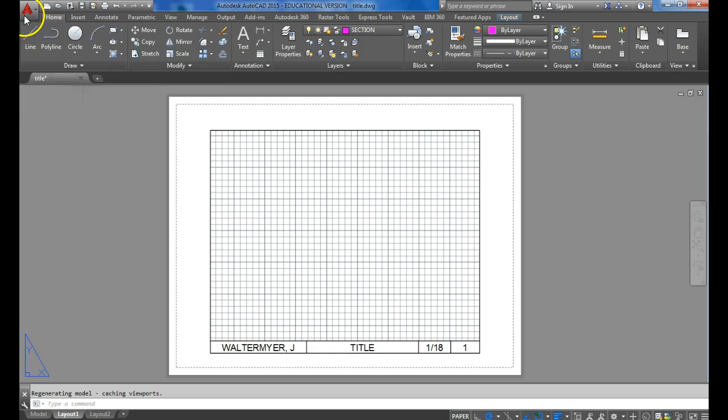Alright guys, so this is probably going to be our last assembly drawing. I already went ahead and opened up my title. I'm going to save as. This whole assembly is a machine screw jack. So I'm going to save it as MSJ1 for this first part. I'll update that stuff then.

Alright, this one is a lot of round things, kind of like pretty much all the other assemblies we did. I'm going to start this first part. This is the base to the whole jack. I'm going to do a center line 1.625 long. That's my entire length. I go object.

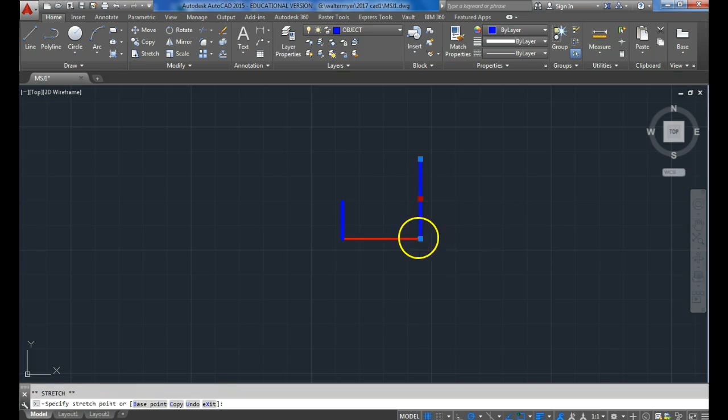Alright, this side diameter is 1.5 inches, so I'm going to go 0.75 up. The distance doesn't flat out tell me, so I'm going to come from this side. Diameter is 1.625. 1.65. I'm going to grab that so that it's centered up. Alright, this comes over 0.313.

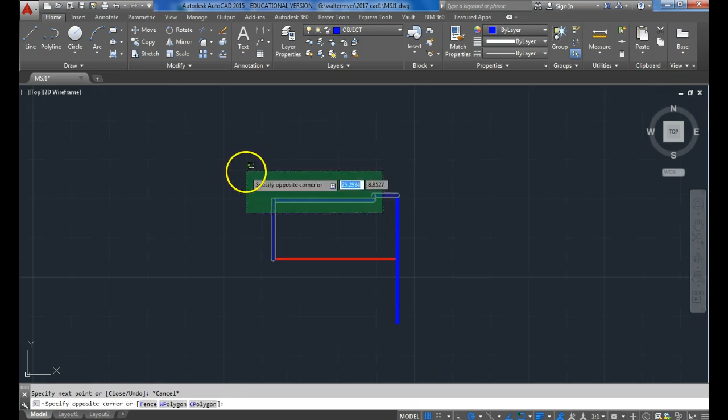That goes down to the smaller diameter. Bring this over and connect. And the bottom exactly the same. We add, stretch this line all the way across.

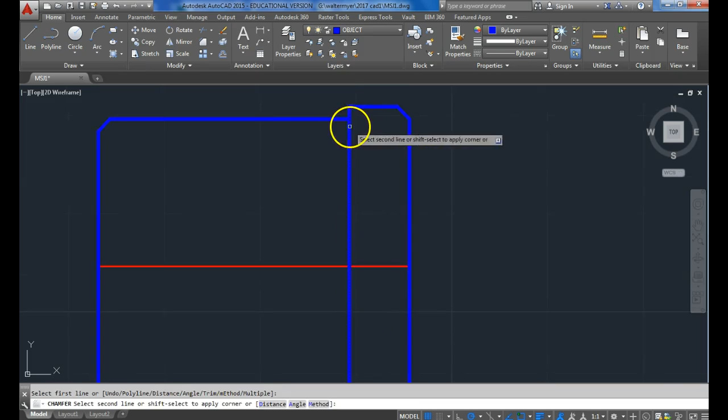Alright, let me do the chamfers first. So under fillet, chamfer, I'm going to do distance. Alright, distance is 1/16 by 1/16. Chamfer there, this end, and there. That makes new edges, so I will connect.

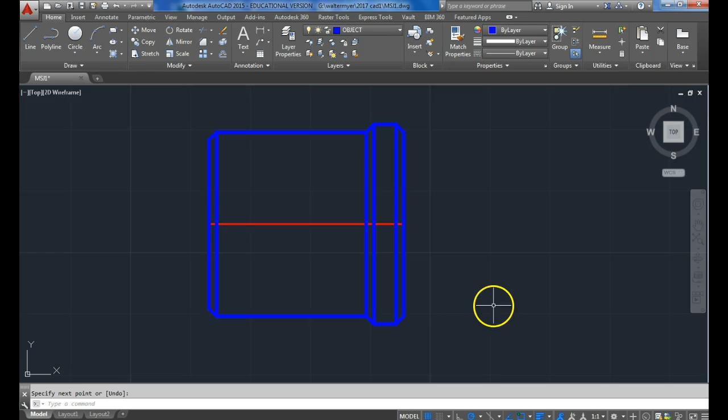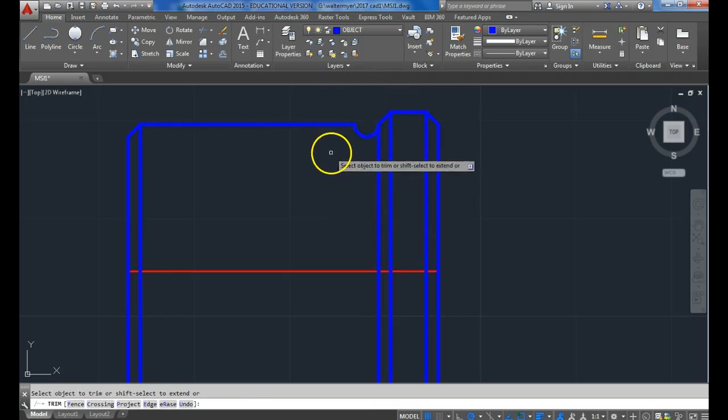There are internal threads, so we're going to do a partial section view here. So let me get the basic shape down. Do a 2-point circle. I'm going to go here. I'm going to come over the diameter, which is 1/8. Trim. This here. Have it down here. Trim. That trimmed. Has new edge.

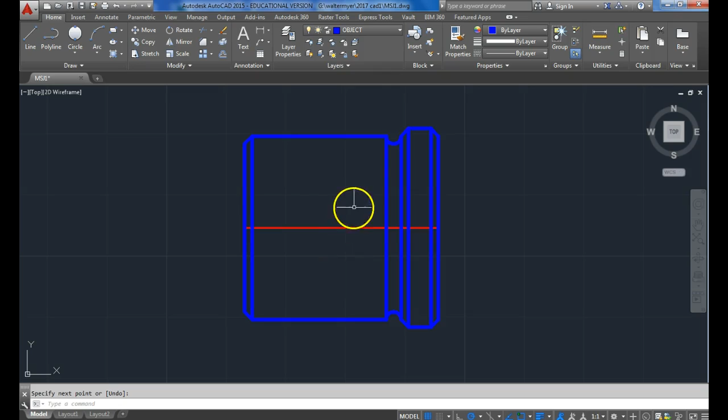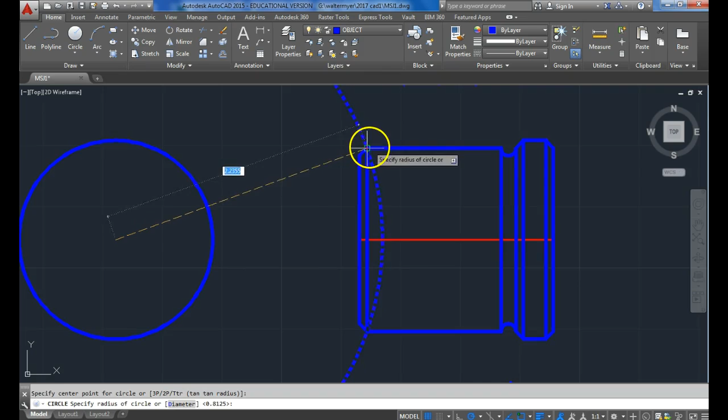There we go. Now, before I worry about doing the diamond knurl or the section view, I'm going to do the side here where I have the circles. If I do center radius, I can just bring them over. Center point. This one over. Center point. Alright.

Now, there is the inside hole for the threads. Alright, diameter threads are 1 inch. So 1. That is going to be hidden. I'm going to use offset 1/16 and offset it. And inside 1, I can see.

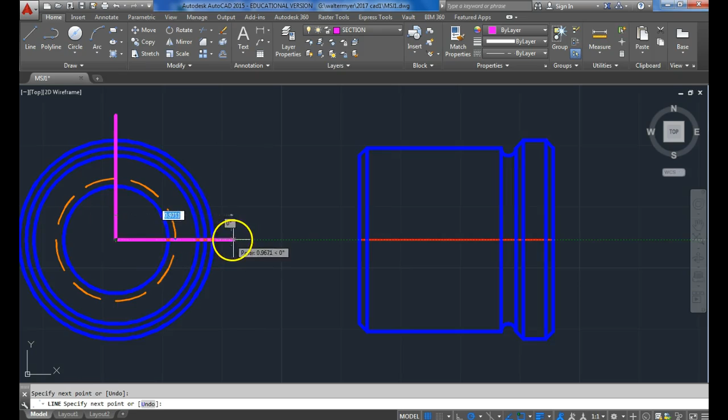I'm going to add in my section line. I'm going to come down and out. I'm going to insert my arrow, place it that way. Now, how we're going to do this one.

If I put another arrow pointing down here, then I would have a full section view here. This would come unfolded down. If I leave the arrow off on that side, that tells me that I'm just doing a section view on this top half here, which is what I want. So that's why I'm going to leave it.

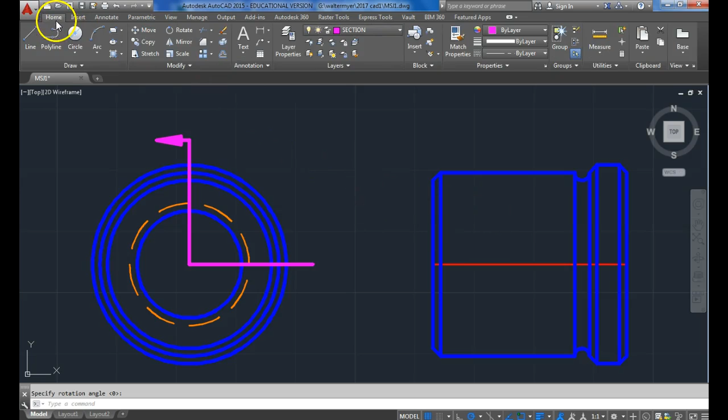Now, over here, let me trim all these outside corners because I won't be able to see them anymore. Bottom's going to stay normal. The top here, bring an object over, the 1-inch diameter circle.

Now on this side, there's a counter bore that is diameter 1.25. So that is 5/4. So I'm going to go up 5/8. And it comes in a 1/4 inch. Bring it down. Now I can trim or just drag this back. I'll have a line there.

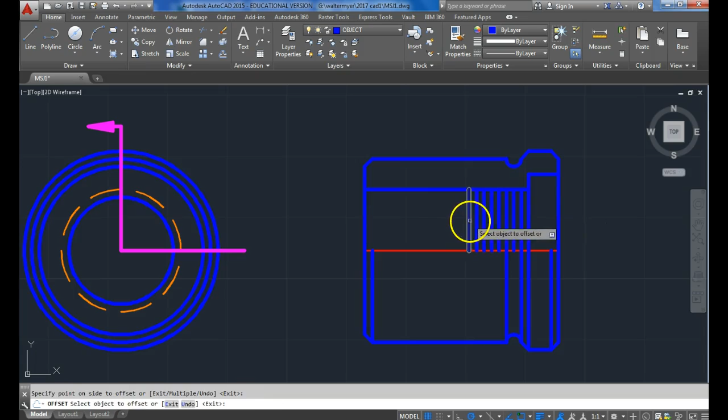Alright, so this bigger side doesn't have any threads. This whole section does. So I'm going to use offset 1/16. I'm going to use that to make my threads. And just kind of filling it up. They're spaced out the same, 1/16 away from each other.

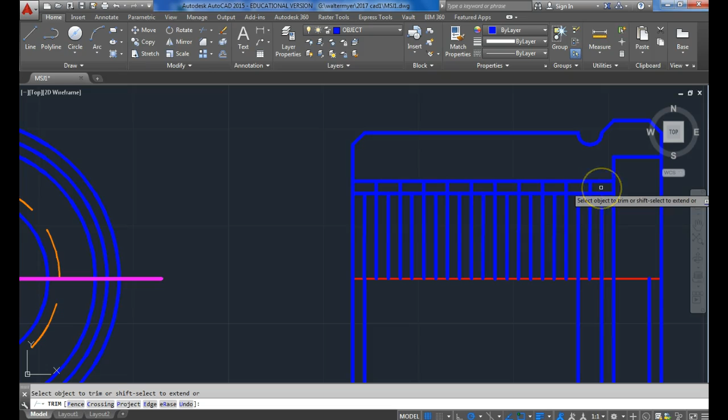And then every other one's going to be trimmed. It's going to be trimmed a 1/16 in that outside diameter. Down, trim, enter, here. Alright, so I have the threads here.

What I'm going to do before I delete this line is I'm going to mirror it down, because on the bottom half it's going to be the other way shown threads, where it's just the hidden lines. So I'm going to select these two. Also going to do this line here. Use mirror, go around the center line, click, enter, and then these three are going to change to hidden.

Alright, that way if I go here to here, I'm going to get my diameter of that counter bore, 1.25 inches. I'm good. Now I'll take this line, delete it. Now I'm going to add in my knurling. I go to hatch.

Add this through there. Top here is cut through, so I have to add hatching in there. It is cold rolled steel, so the pattern you're going to want to use is ANSI32.

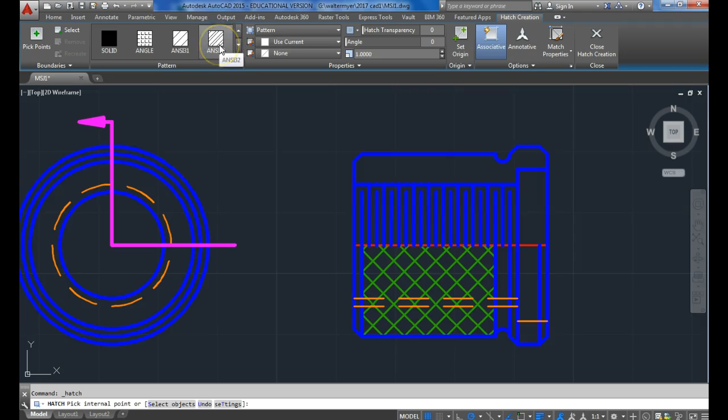And click to place it. Alright, so this one's all done. I'm going to pause, add in dimensions, and then I'll start on the next piece. Alright, I added in all the dimensions.

There's just one circle I forgot to make. It's going to be hidden. It's going to be circle for this counter bore on the far side. So it is 1.25 in diameter.

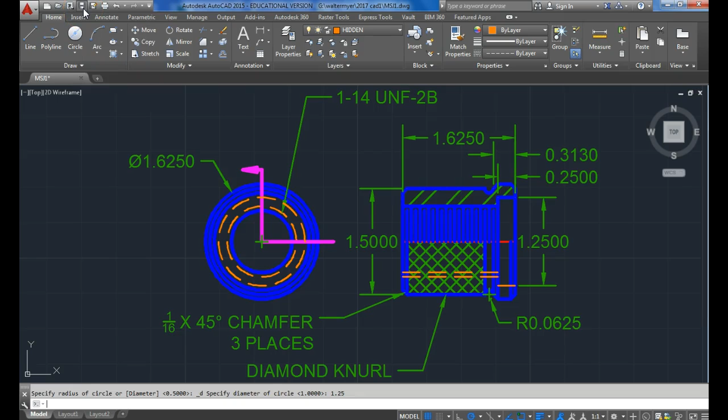So this one is all completed. You can pause it and check out the dimensions if you need to. The same ones on the paper. So I do save.

Now you can pull up your title. I'm just gonna save as the next one. Alright. The first one in there, hopefully you guys understand that I didn't just delete it, spend the time making it just to delete it.

So that was kind of the base of the jack. This next piece is going to be the first one to screw into it.

I'm going to start it same way. I'm going to do center line to overall length, 1.625, so inch and 5/8. I go object. This side is a 1/2 inch in diameter, so I'm going to go up 0.25.

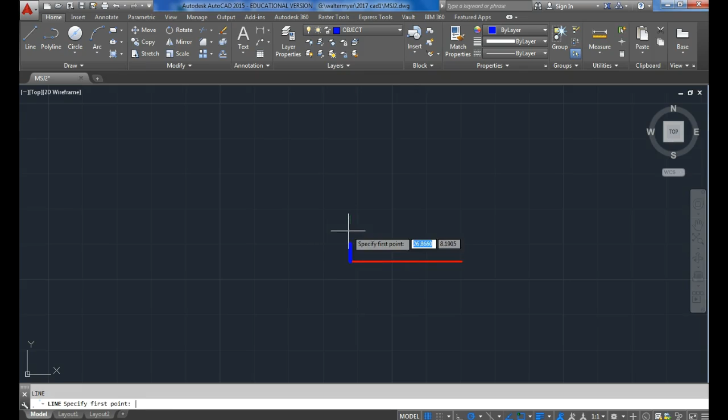This side, wait, it is a full inch. I already divided it in half in my head. 0.5. And this end is 1 5/16.

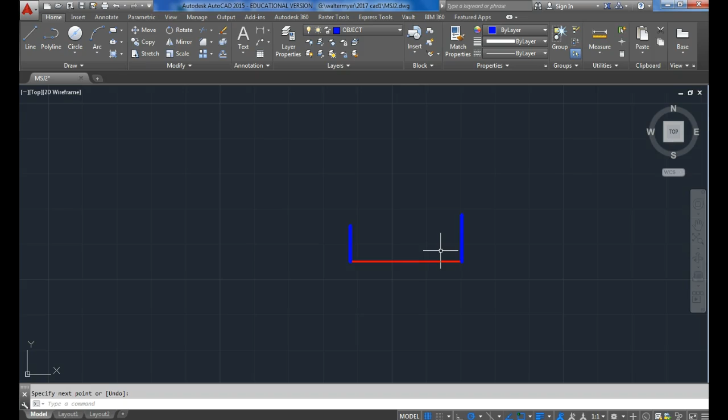So I don't remember what 5/16 is in my head, so I'm going to go improper fraction, so 21/32nds. All I did was change 1 5/16 into improper fraction, which is 21/16. 5 plus 16, 21. And then divide in half, I just doubled the denominator. So instead of 16ths, it's 32nds.

This bigger diameter comes over 5/16. I'll take her down. This side goes all the way over.

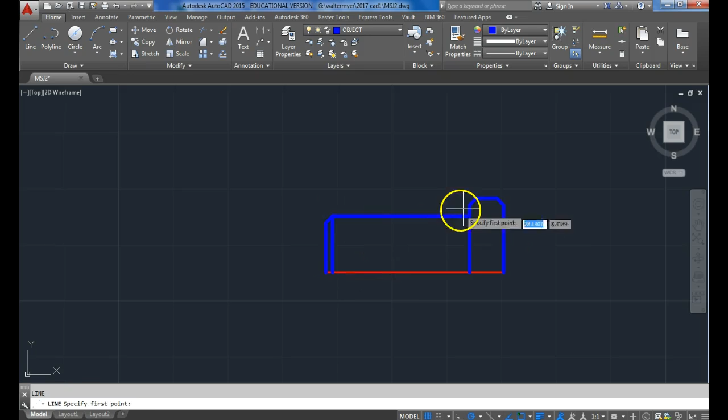And I'm going to do my chamfers. It's a 1/16 by 1/16. Mine's still set up, so all I have to do is click them, connect my new corners, and do a 2-point circle. There's a cutaway here, 1/16 radius, so it'll be 1/8 for a 2-point.

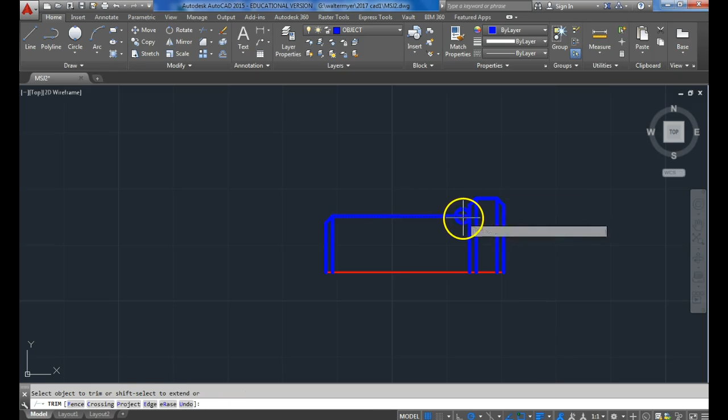Trim here and here. New edge. Alright, the outside is threaded, so I'm going to use offset 1/16 and fill this up.

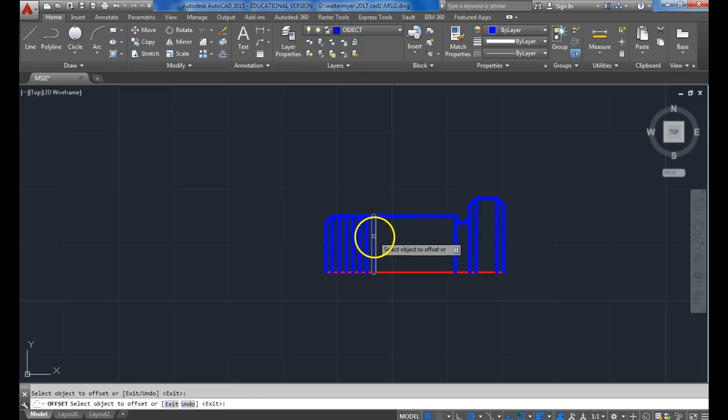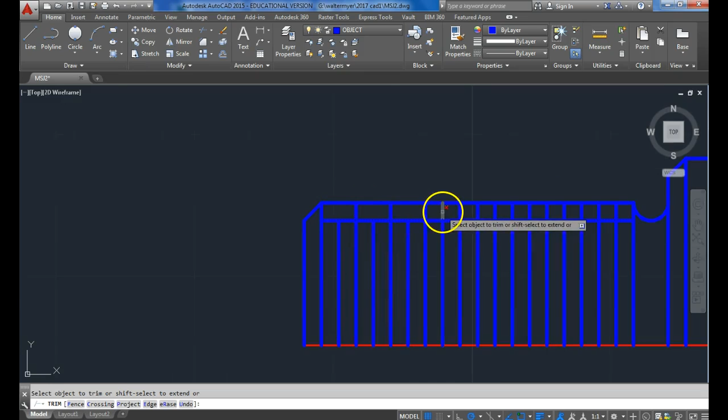And you could use array for this. I'm just trying to keep it simple. 16th trim. I'm doing every other one. That, leave that one. Alright, so there's external threads.

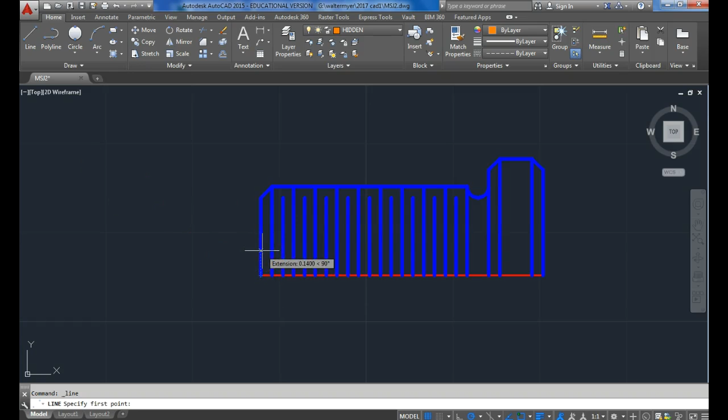There are also internal ones. Right, the threads on the inside are 5/8 in diameter. Hidden. I'm going to come up half of 5/8, so 5/16. Take it and they go all the way through.

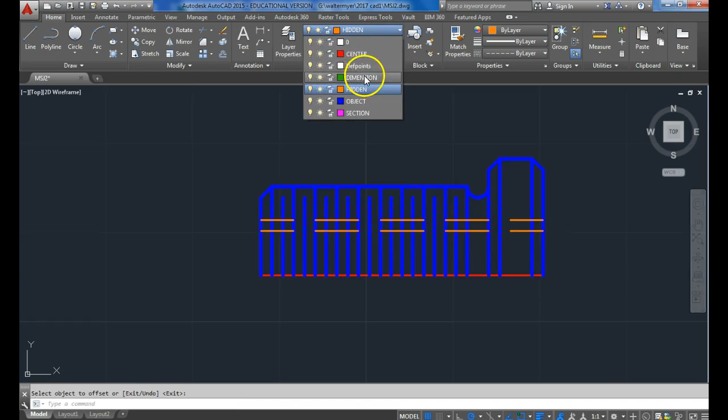Offset 1/16 and bring it down. Alright, last thing for this top, I'm going to use hatching, add my diamond knurl pattern here, here, and here.

Alright, so 1/2 of this is done. All I gotta do, mirror around the center line, hit enter, and I have this view all done.

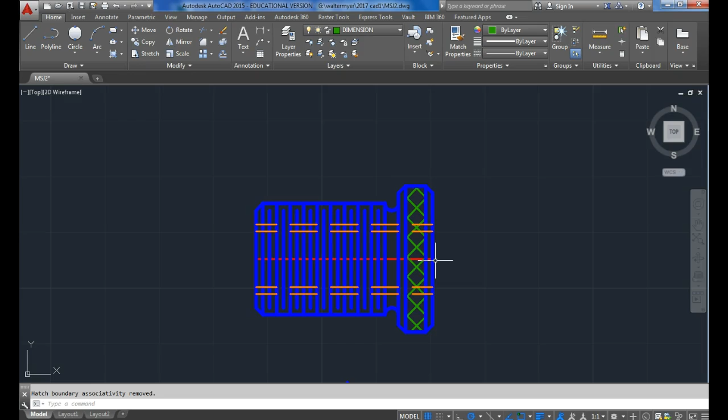I would be able to see this corner from this side. Alright, next down would be here, which I already have. Next step down would be here, which is going to line up with this edge, which I can see one over, and I have the threads on the inside.

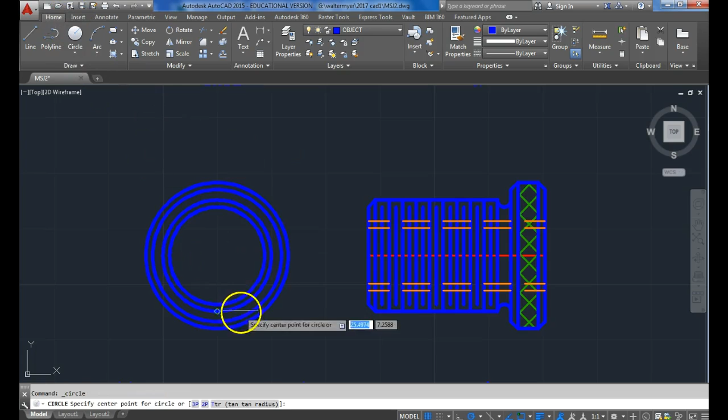Smaller diameter, I can see. The bigger diameter is going to be hidden. We have that. No section view on this one.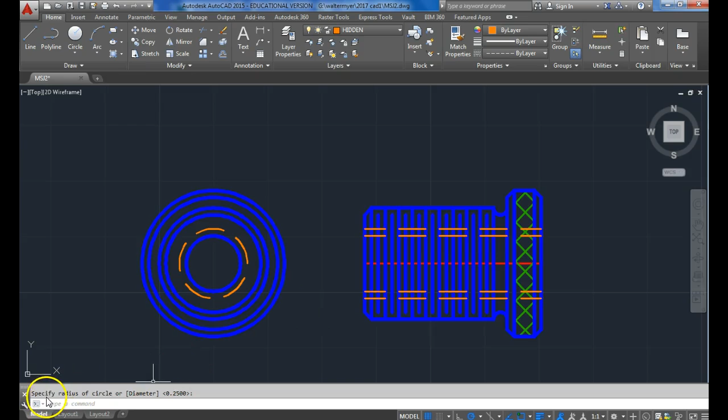Again, I'm going to pause it, add my dimensions, and pull it back up for you. Alright, so here's all the dimensions.

Labeled the threads, diameters, lengths. You got your radius, all 3 chamfers taken care of there. I'm going to save. Part 2 is done.

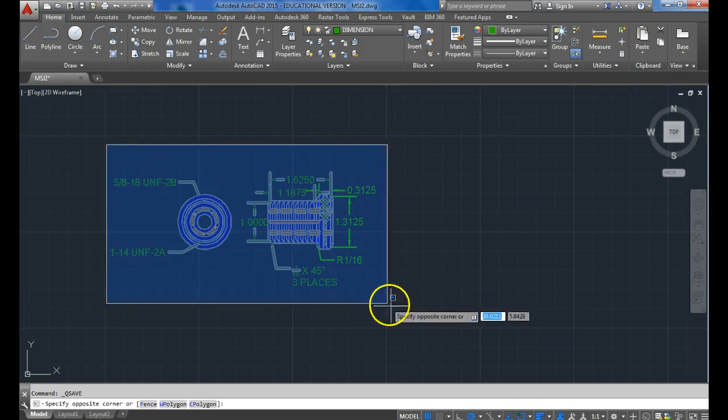I'm going to clear this off. File, save as, MSI3.

Alright, third part is probably the most, I don't know if I'd say complicated, but involved ones.

Alright, same thing, center line for the overall length. This one is 2 5/16. I'm going to do 2, and I'm going to do 5/16. I don't remember what the decimal is for that.

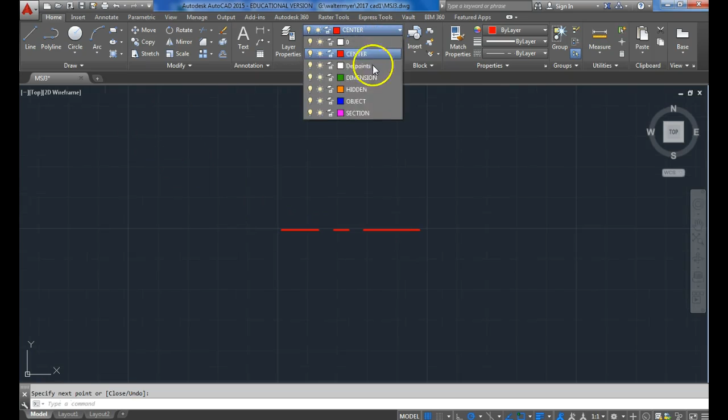Object, I'm going to start on this side. The diameter of this side is 5/8, so I'm going to go 5/16 up, and it comes in 1.25. Connect down.

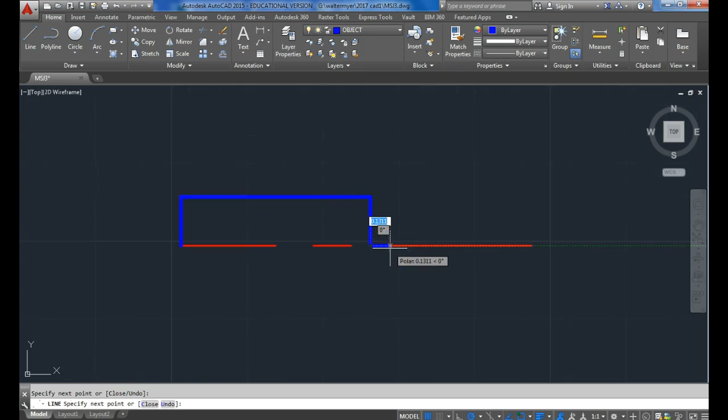From there, there is an undercut circle, so I'm going to do 2 points. This is radius a 16th, so I'm going to do diameter an 1/8.

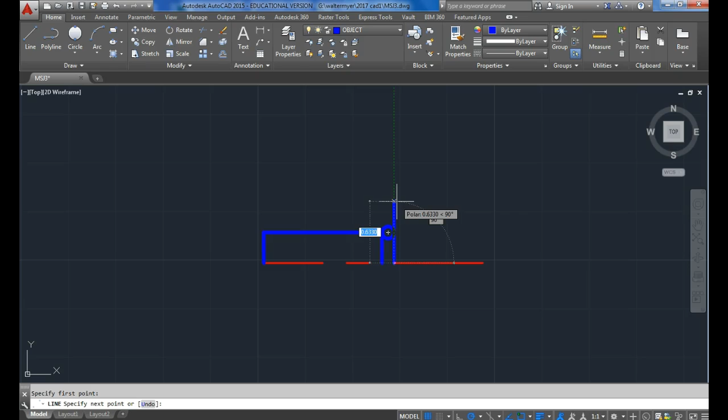Here, up. Then it goes up to the bigger diameter, which is 1 1/8, so that's 9/8. Half of that is 9/16. Thickness of that is 3/8.

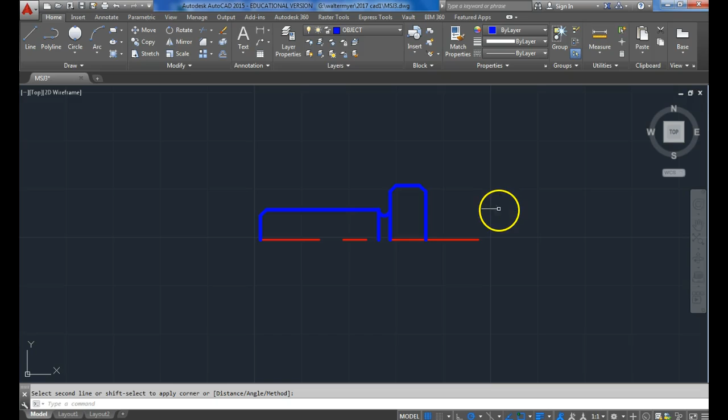Connect back down. Use trim there. Alright, now I'm going to do my chamfers. Mine are still set up, same size, 3 places, here and here. Add in my new edges.

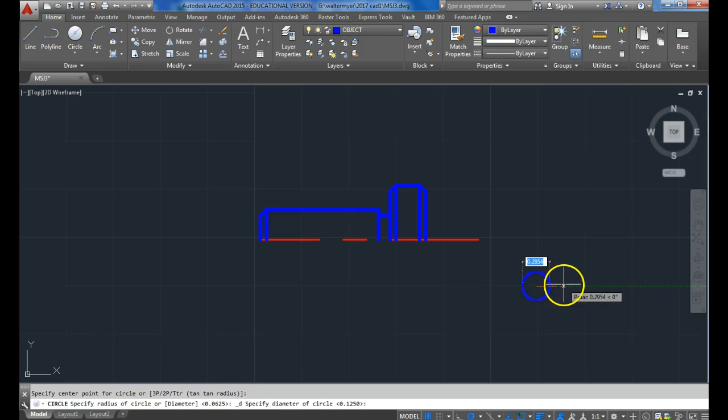The top here is where it gets a little tricky. There's a partial circle, so I'm going to do that. I'll just go out here, kind of know where to land. It's 9/16 diameter. Now I'm going to do move, select the circle, and grab it by this quadrant.

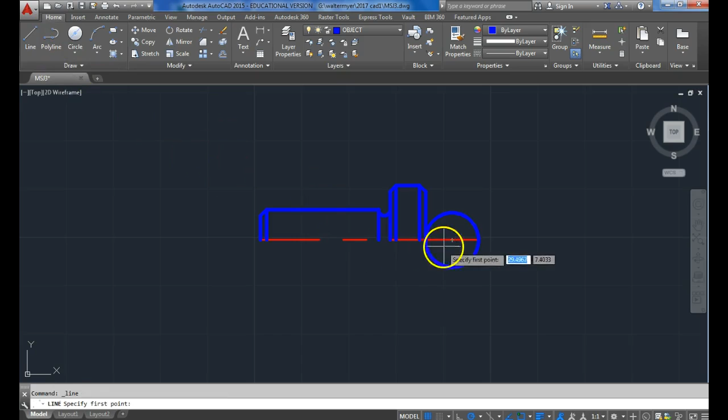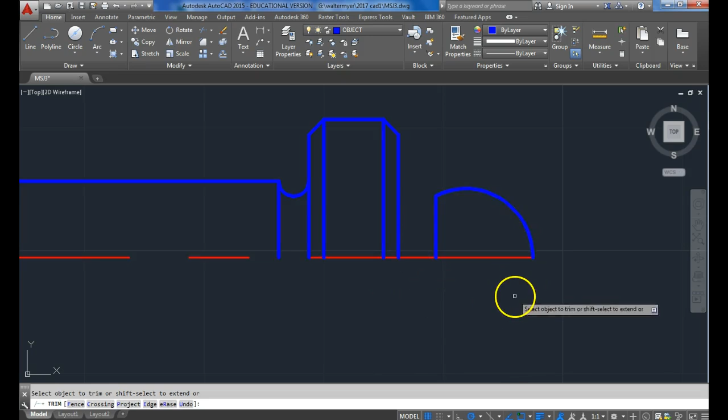Now this space between it is easy. It's a 2-point circle, here and here. Trim, top off.

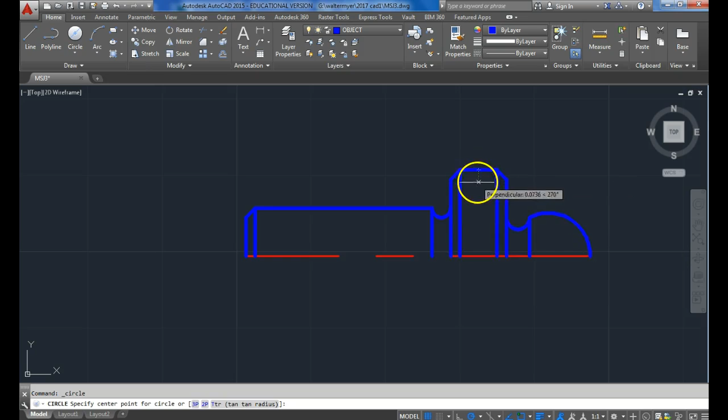Now if I do a center diameter, go from this midpoint down, line it up. That is a 3/16 diameter. And then I have some threads here, so I'm going to use offset 1/16.

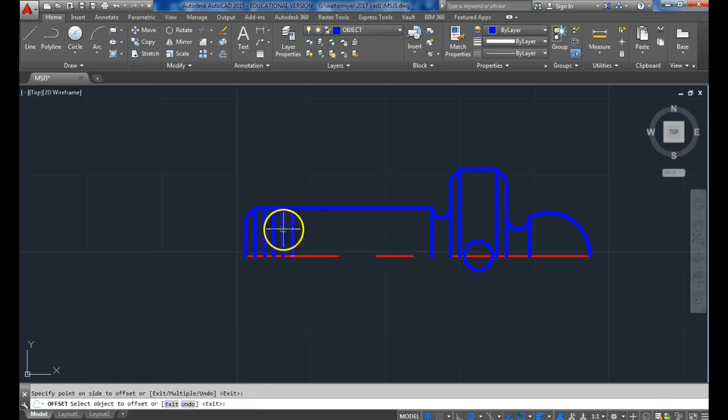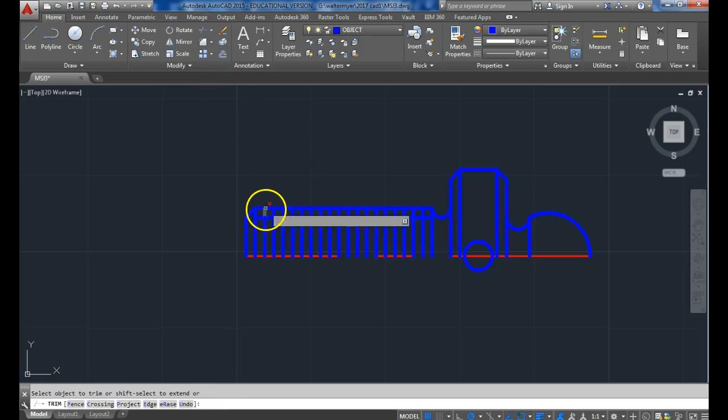Spread these across here. One more, top down, trim.

This one is spaced a little bit unevenly. You're going to end up with a full line next to a full line. Not a big deal.

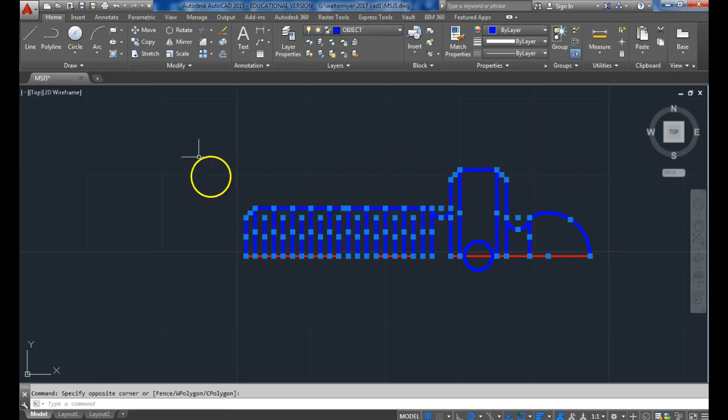Alright, I'm going to take this whole thing, do mirror, abracadabra, hit enter, and would have been magical, but I forgot one line here.

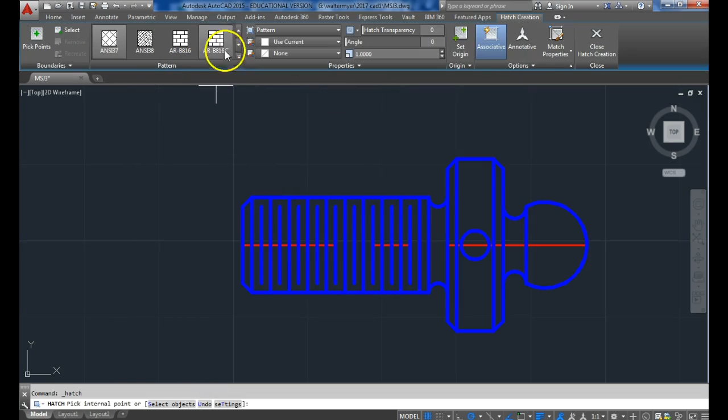Copy here, add in my diamond knurl, ANSI37, there. This side is all done.

I'll do my circles, center radius, line it up, 5/8. Got this side. There we go.

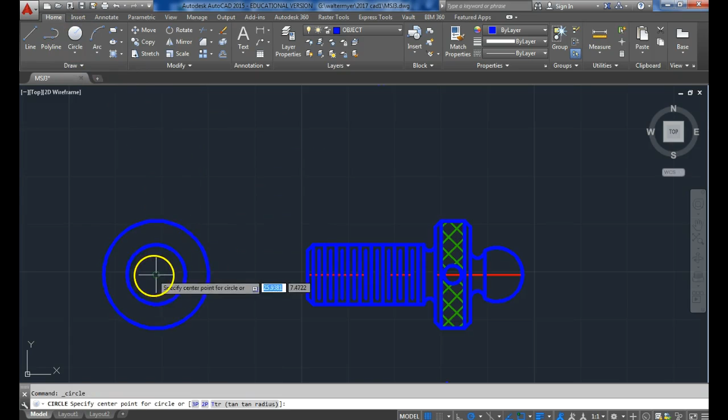Be able to see this chamfer. I would be able to see the chamfer on this big diameter. Then I'm going to have it hidden.

I'm going to have this circle. It's kind of in between. I lost the point.

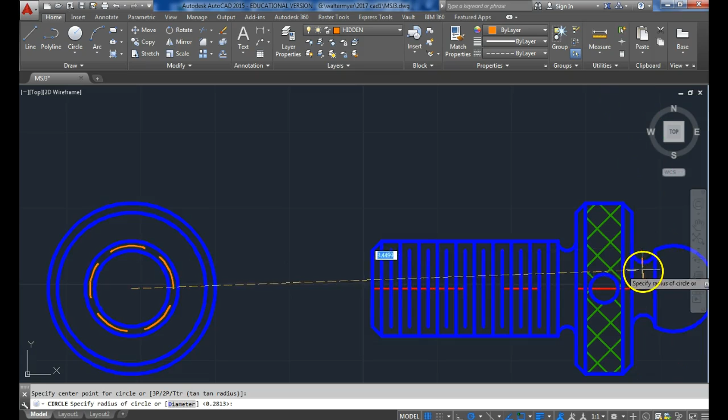Between, I'd have bottom, this undercut. There you go. And then I would have top of this hole drilled, and bottom of this hole drilled. They're all the way through, so the hidden lines go all the way across.

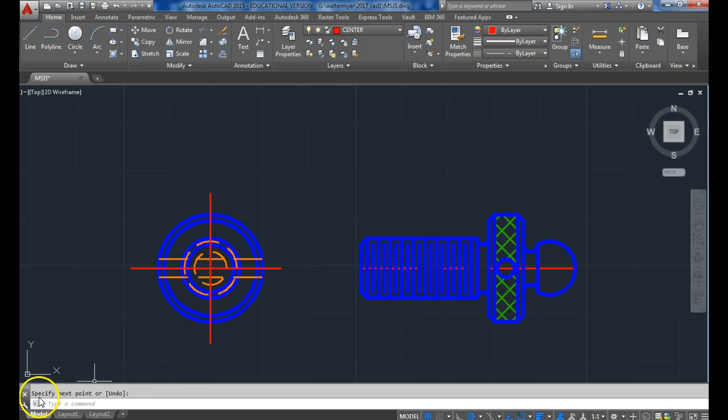And center lines. Alright, same thing. I'm gonna pause, pop in dimensions. Alright, so this is part 3 that's done.

This one has one more part than the other ones we've done, so I guess you can consider it a little more complicated, not very much though. So all the dimensions on this one are all good. I'm gonna do a save.

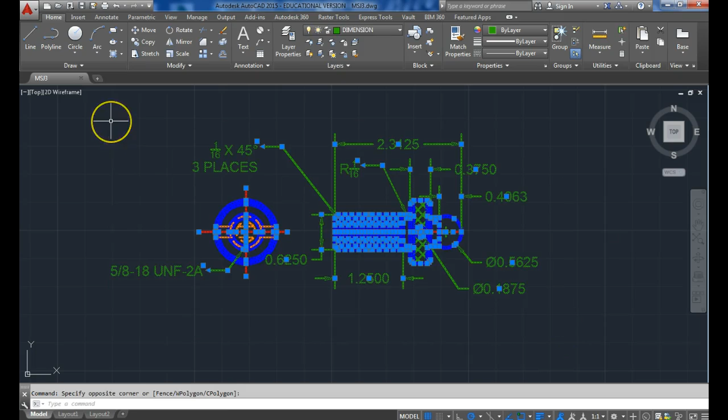I'm gonna clear this off. File, save as. For this one, this is the smallest part.

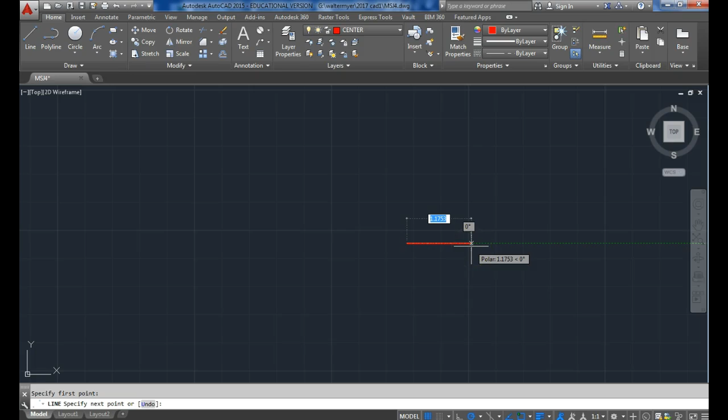It's the cap that goes on the top of the jack to make it kind of adjustable. 5/8 center line. Here we go, this side is raised up.

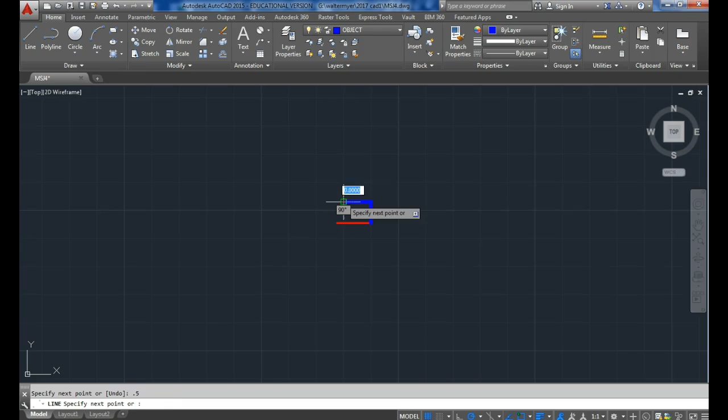We'll come over 1/2 inch. This side is 5/8, so I'm going to go 5/16. Connect on an angle, have my edge there. Bring my hidden lines.

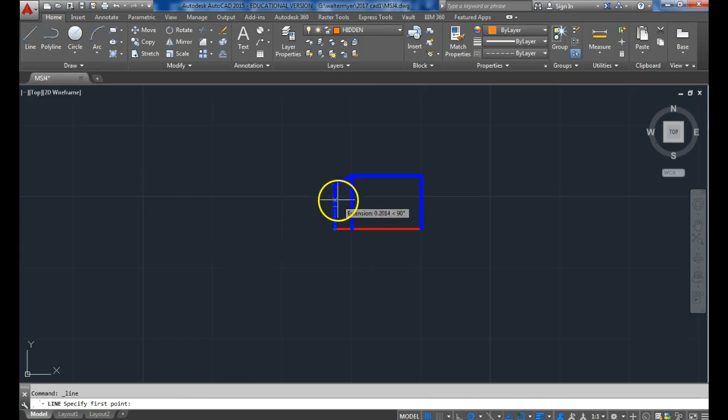The hidden lines, the diameter is 9/16, so I'm going to do 9/32. Depth is 3/8. Back down. This is on a 60-degree angle, at 60.

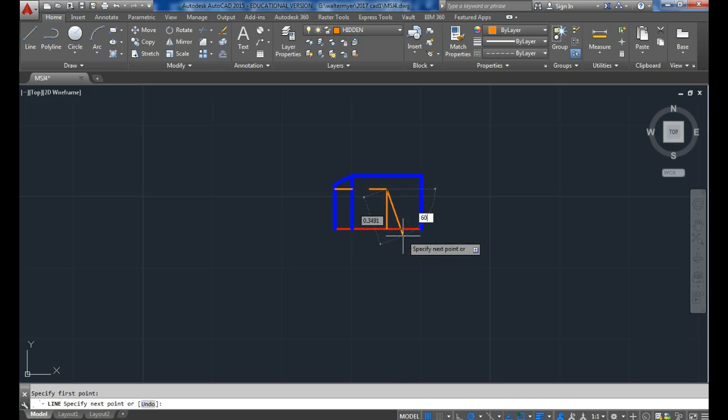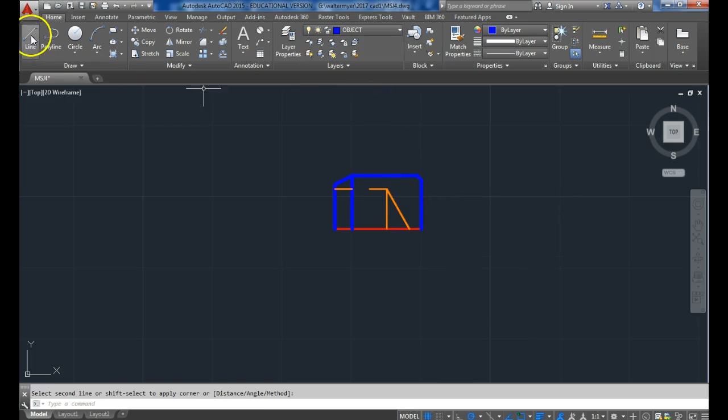Trim that. Chamfer here on the end. This one is different, smaller, 1/32 by 1/32. There and there. Gives me a new edge.

I have this one pretty much all done. Take mirror, flip it around. Circles are simple, line my center up.

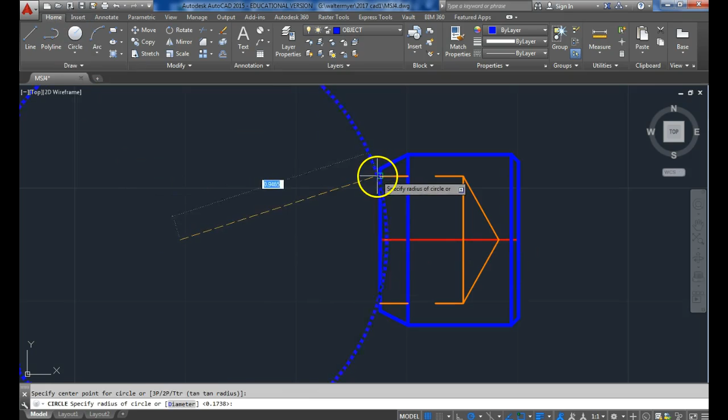This one's just a drill. On this side I can see it. This corner I can also see. Center point, this one I can see. Now we only have one hidden, and it's going to be for the chamfer on the far side.

Chamfer on the far side. Bring that, and I'm all done.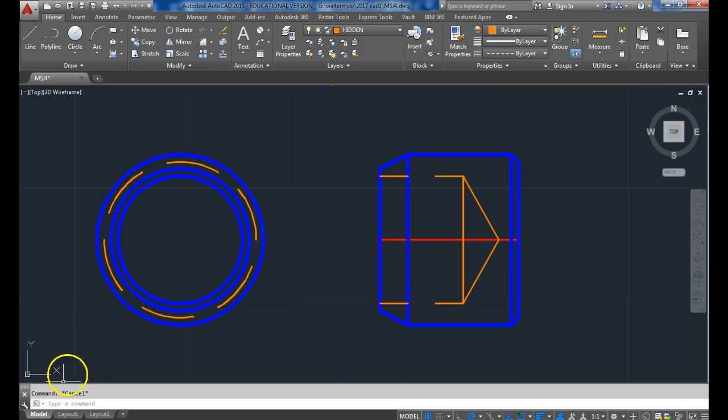I'll just add in the dimensions while it's running here. These are all for the parts. I will then make another video where I put them together so it doesn't get too incredibly long.

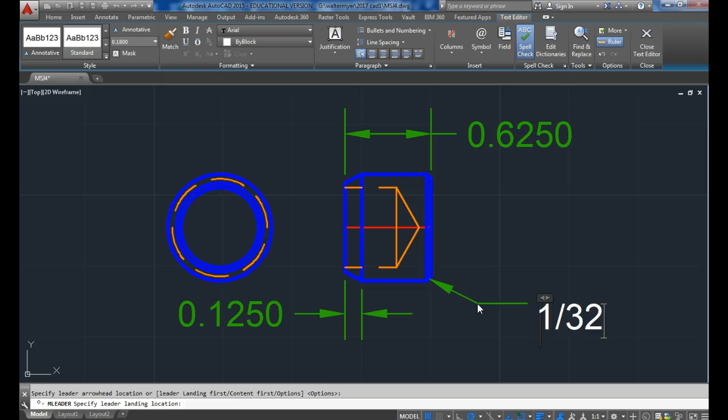I got my chamfer here, 45 degrees. This one here, and this, 9/16.

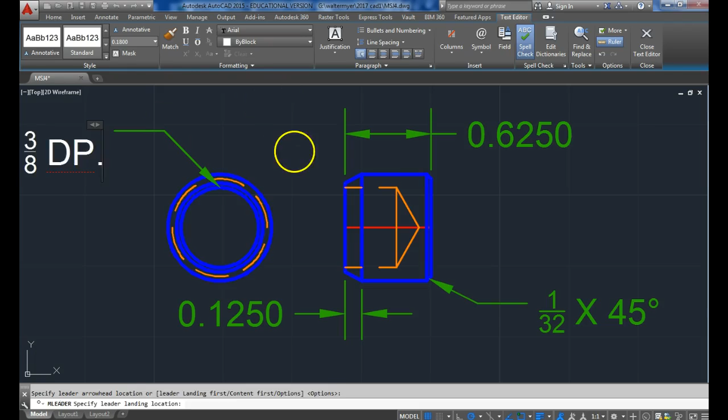By 3/8. So got that, dimension here. This diameter, 5/8. I'm overlapping, so I'm going to drag it up here. Got that diameter, got my depth. So this one is all good.

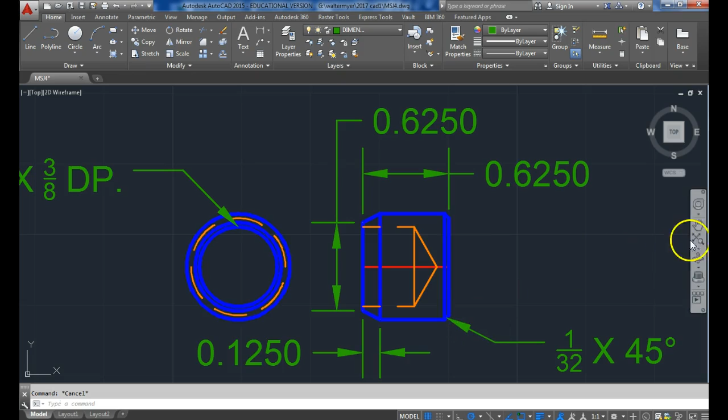Zoom extents, we add in center line. Again, these parts are small. If you wanted to adjust the size of the text, you can.

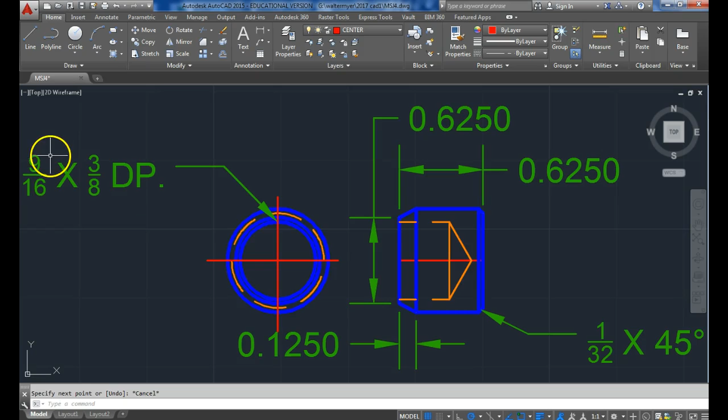Alright, so that's all 4 parts of the machine screw jack. I can then, like I said, make a separate video showing how to assemble all of them. Hopefully you've been saving each one individually so you have all of the actual drawings.